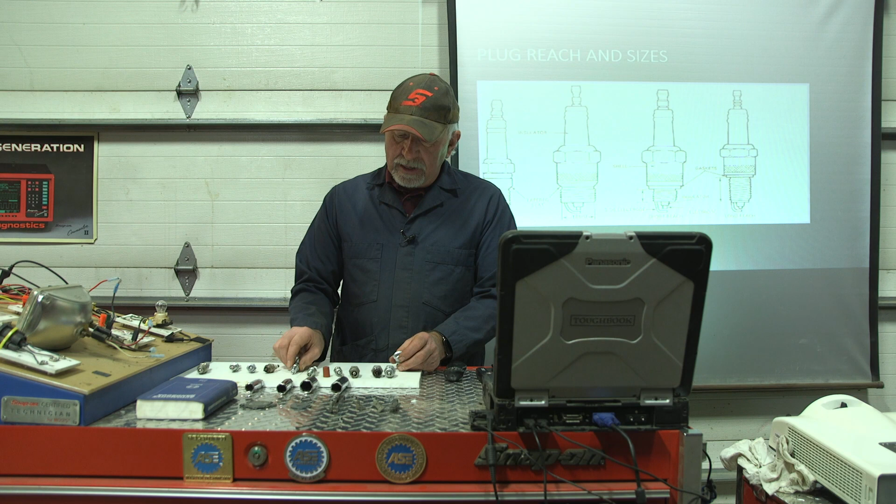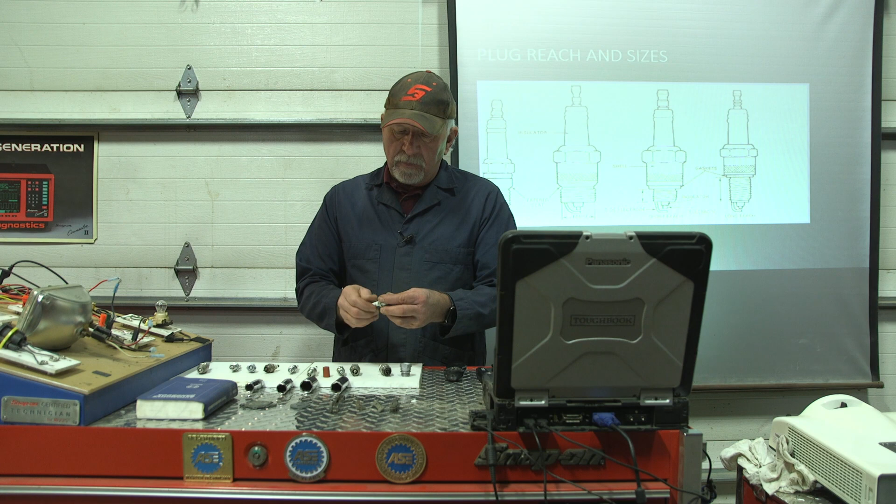That is simply an adapter that goes from 18 millimeter down to 14 millimeter. Where this really works out is it allows me an endless number of different heat ranges that I can install, versus the situation where I'm limited on what I can put in. So here is an example. I just have a 14 millimeter plug, and I can choose literally an infinite number of heat ranges. Try to find the old fashioned 18 millimeters in many different heat ranges, and it's very limited. So if you're doing some modification, everything from tractor pulling to antiques, this is a neat investment. I buy them by the brick from a company over in Michigan, and I have them in literally all my equipment around here, and I put them in a lot of collector pieces. So I wanted to pass that on.

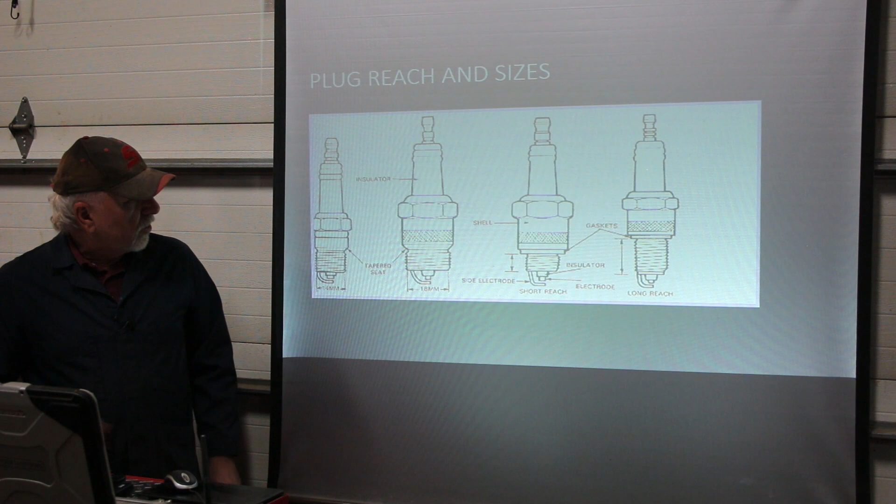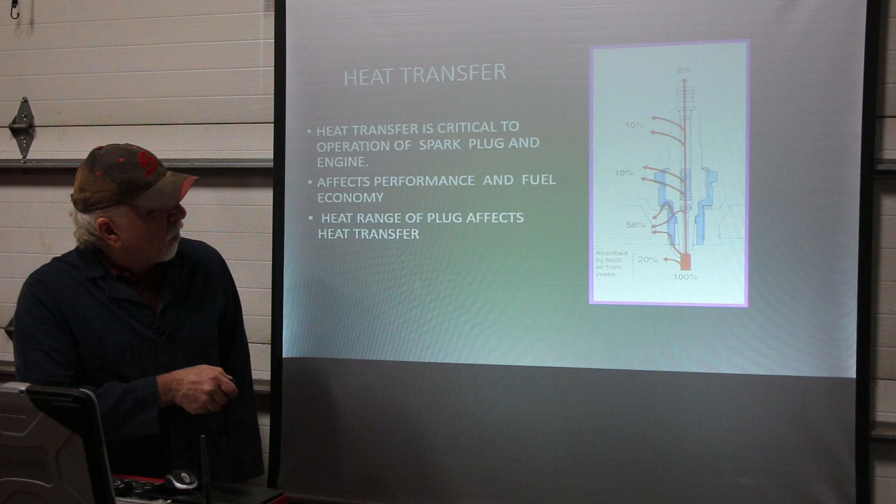Okay, let's get talking about the heat range itself. So within the spark plug, you can see where the depth of the porcelain is, how that's sealed, where this is in, and there's a lot of other configurations we have to consider here. What the performance of the plug itself is. We need to look at how it gets rid of the heat, where it's put in from a performance standpoint, and the heat transfer, how that is going to impact the spark plug.

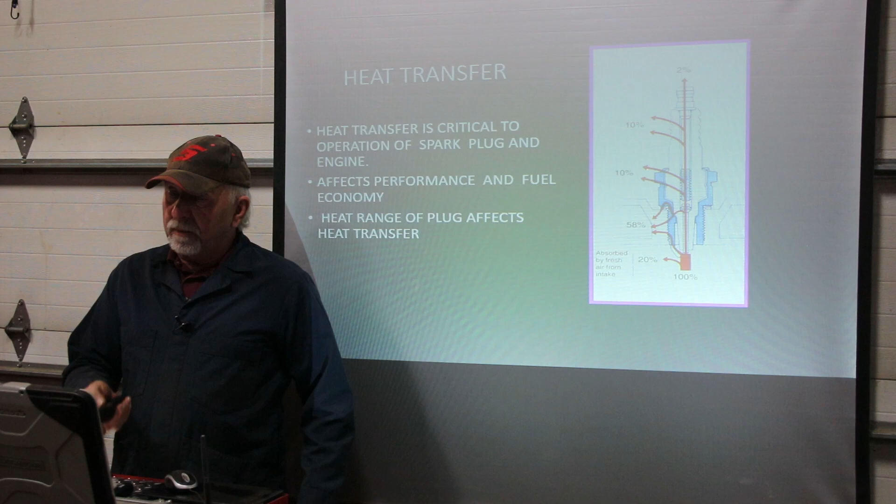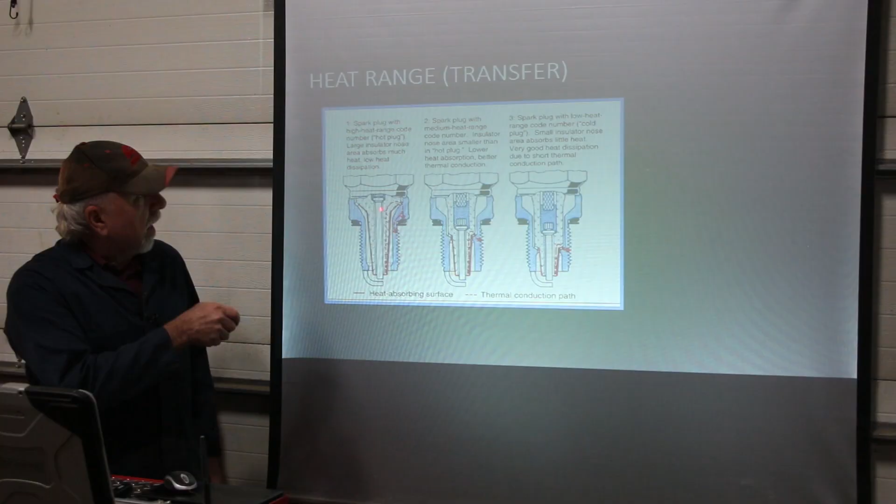Well, you can see here we have the three different versions. We have one that is intended as a high heat range. So the seating of the porcelain goes very deep in. So this is going to get extremely hot, and that's what the goal is. We want it hot. That's going to be a spark plug that works nicely in the high heat range. The next one is going to be our classic medium. And then you're going to have a cold plug.

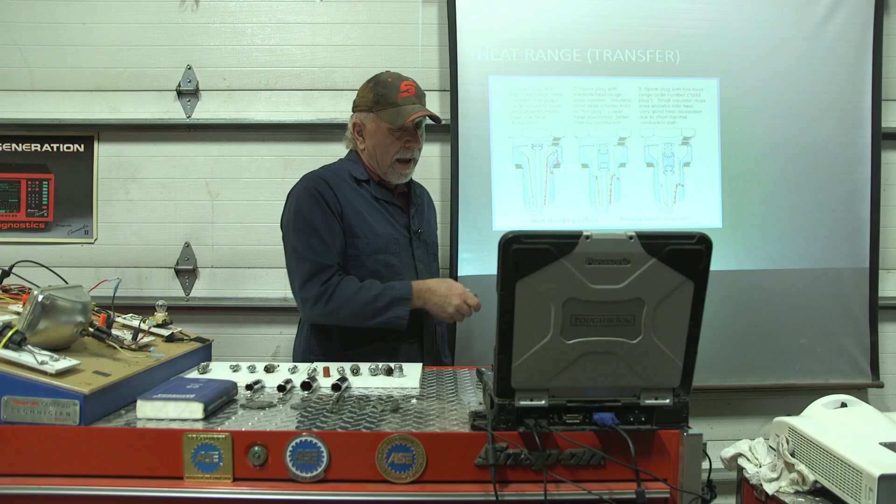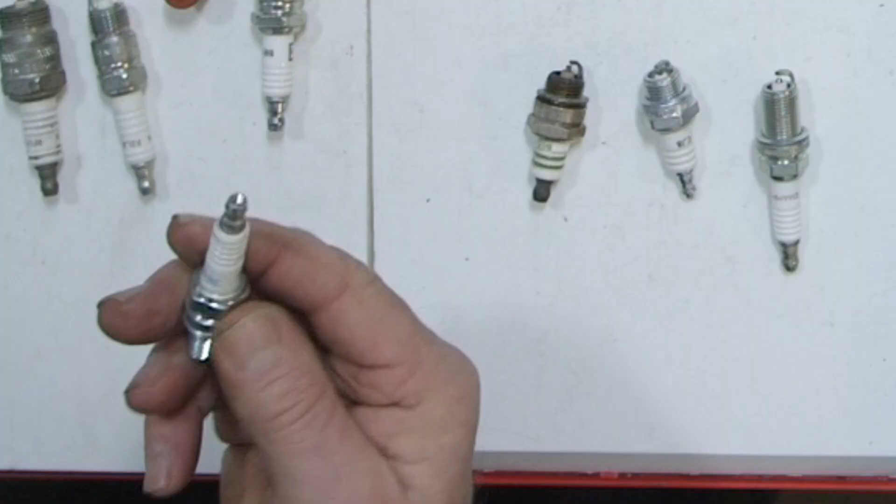And those are the ones that often get you in trouble. Just grabbing one out of your parts cabinet or parts store, saying, hey, I need one that threads in like this. Well, there's more to the spark plug than you're observing from the outside. So that heat range number that you're looking at, that part number, is absolutely critical. So make sure you actually look that over and get the right spark plug.

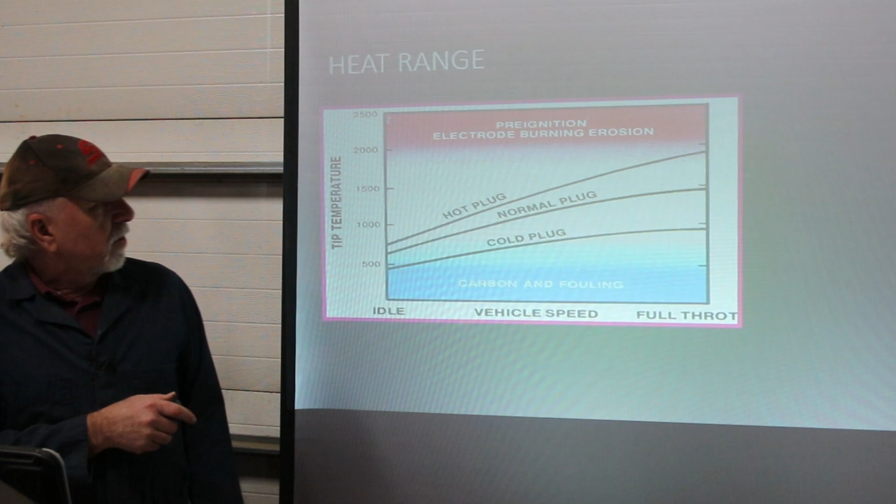Okay, so here's what happens. If we have a hot plug, it's going to be resistant to carbon fouling, but prone to pre-ignition, electrode burning, rapid wear, and can deteriorate the engine, sometimes very rapidly. So the choice is critical.

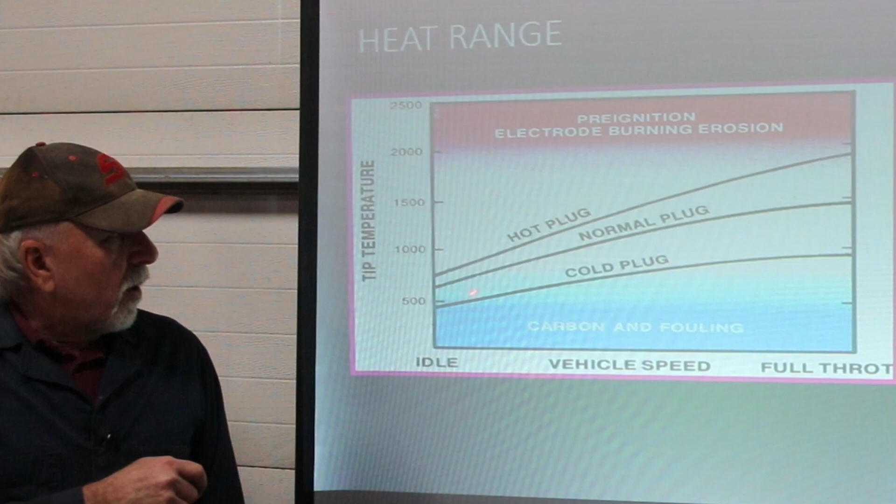Now, on some of the older applications, in all fairness, you will learn if you've done modifications. You put a supercharger, you put a turbo on there, you got nitrous, you change the compression ratio. Now you have to consider what you're going to do with the spark plug heat range. So that is going to be a variable that you'll have to contend with. Now you've become the engineer once you've done that. So having a good understanding of the spark plug heat range is going to be critical.

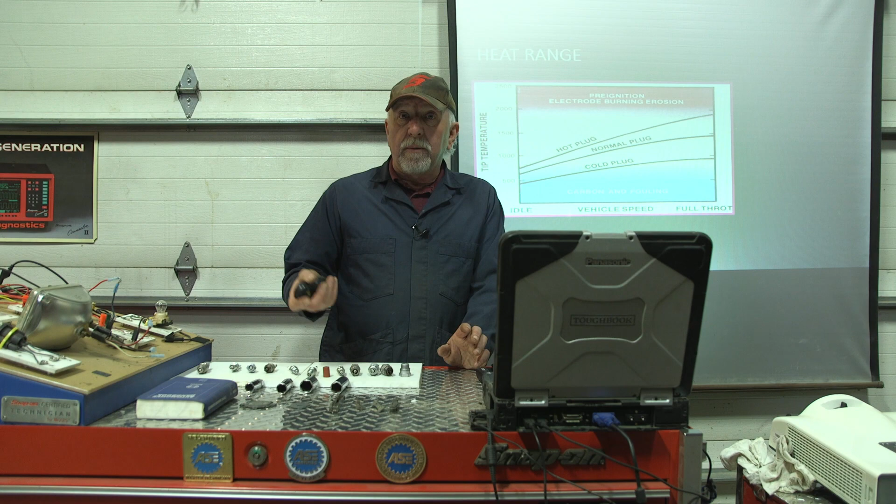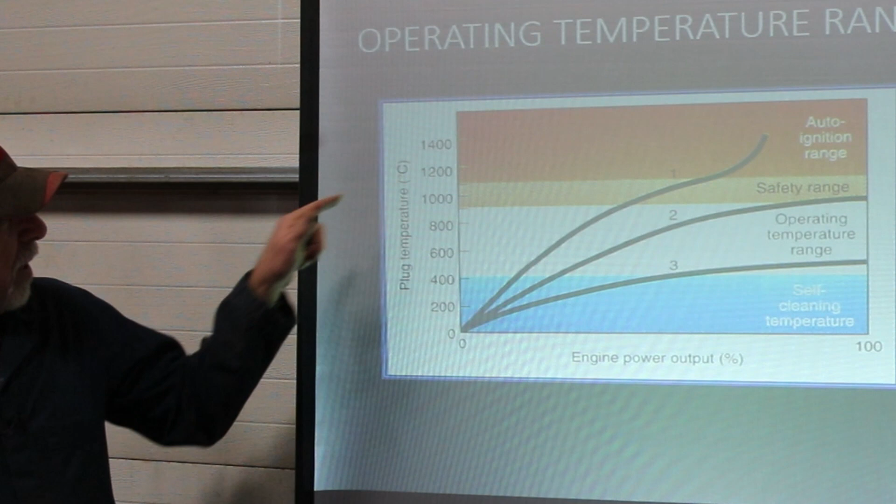So let's talk about this temperature. When we get up here, this is in centigrade. If we get above around 1100 degrees centigrade, we typically now are in auto ignition. Basically think diesel. You got so much heat that that hot spot is simply going to light everything off. And then you got your safe range, where you're getting right up there.

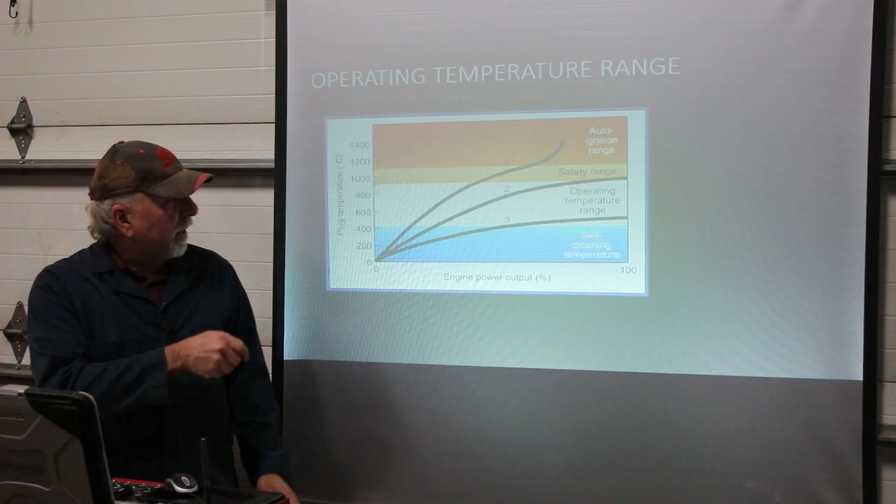The idea behind that is that if you're going to be running a little hotter, you're in extremely cold conditions, or you have a vehicle that is frequently started but never warmed up, you may have to move your heat range of the spark plug up into that point where you can still get the plug clean enough. But if you're going to be using it under very heavy load conditions, you're going to be in that narrow orange band here that could get you in trouble.

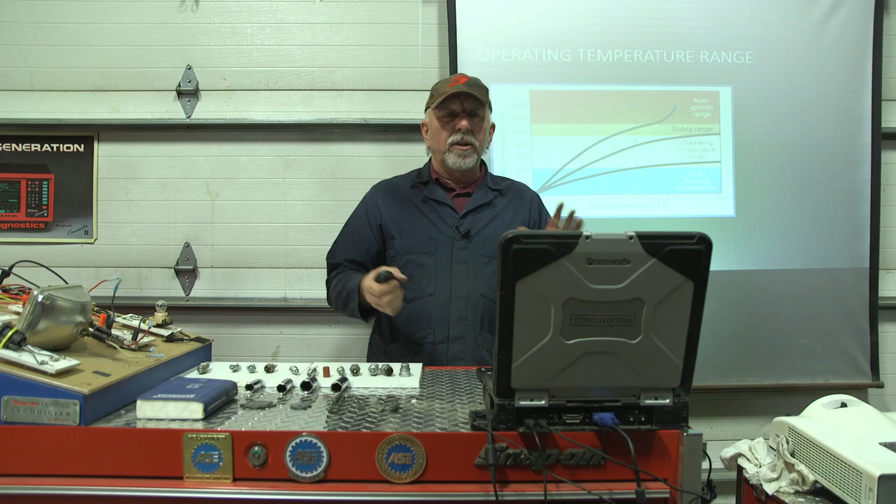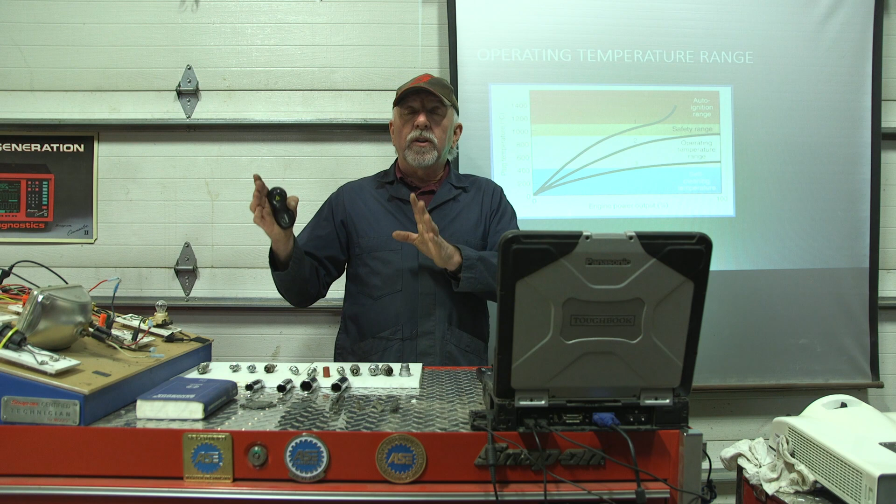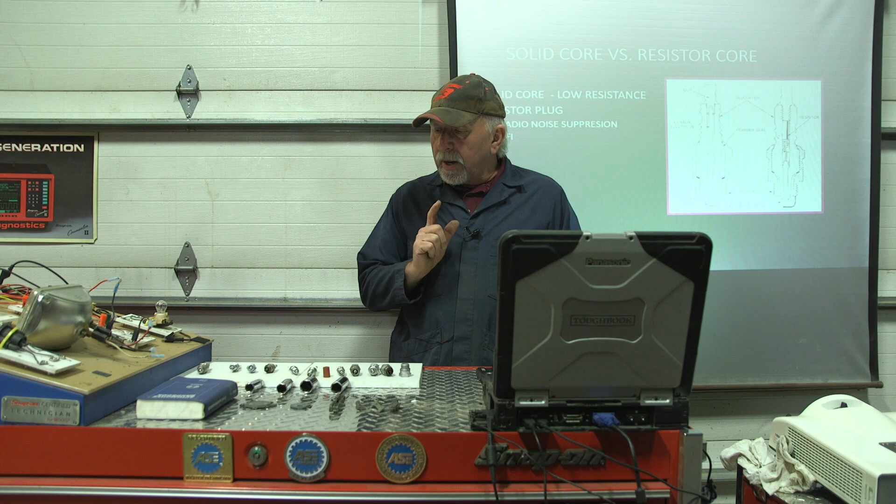Okay, so now we're going to talk about something else that's kind of interesting, and that is if it has a resistor or not. In other words, an R-type or RFI suppression spark plug. What they basically do is, you can see from the picture here, they put a resistor in. And I'll give you a little piece of information that I've learned over the years.

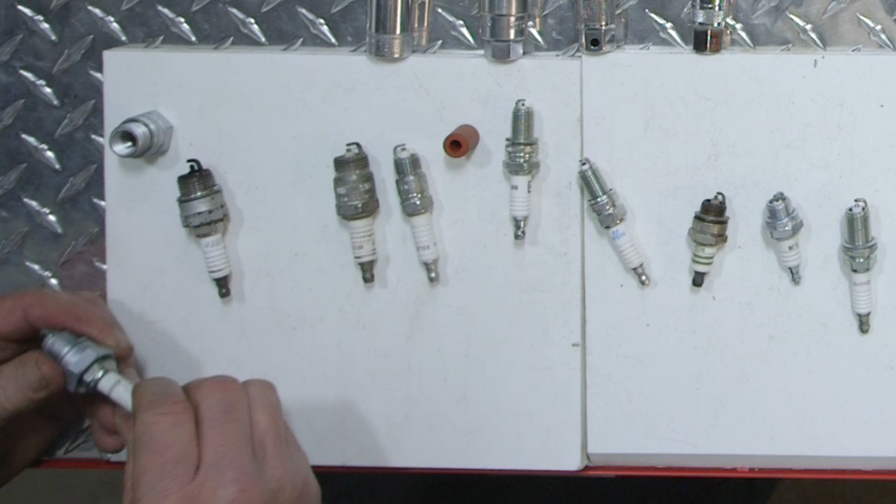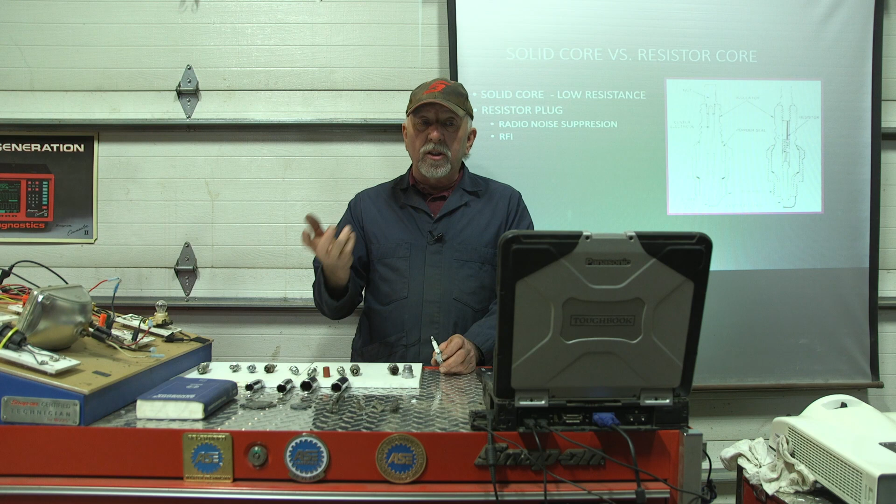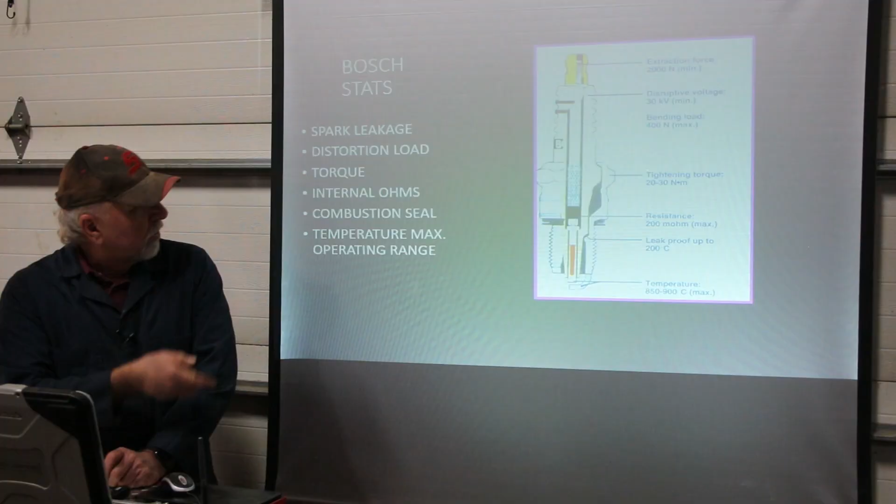So think about a coil buildup. Your coil is going to build up, get to saturation, and ionize across that gap. So in the case of a resistor, you in a sense have two dynamics to get over, let alone the rotor index issue. So you got a whole series of things to jump. When we go into scopes in a later episode here, we'll get into that in great detail. But right now, let's think about it.

The spark plug itself, if it's going to have a suppression resistor in there, that's going to eliminate radio noise and interference with electronics, but is going to have to take a little bit more energy to go through. Our coils are usually 4 to 10x more than we need for the ignition itself. So it isn't that critical, but you take an old magneto. So remember, if you're using this technique with this adapter and putting a modern spark plug in, you may not get the performance you had hoped for if it's involved with a magneto style.

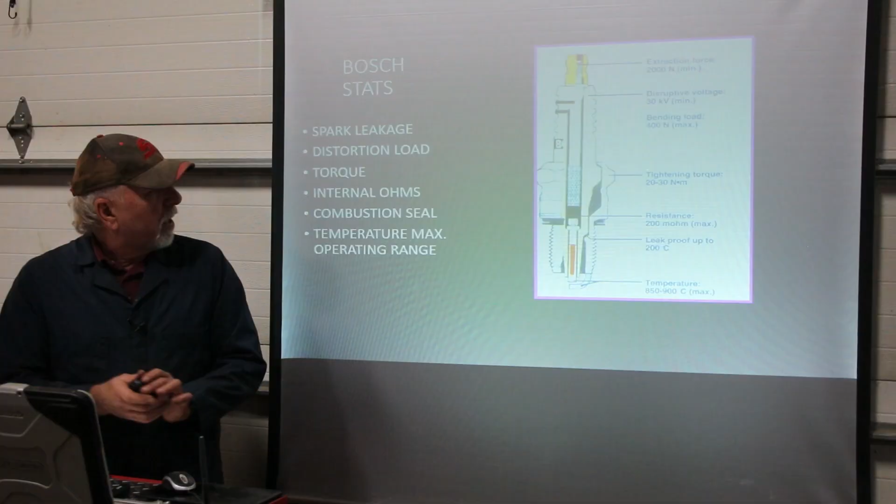A number of things here that we want to talk about with spark plugs are really, really critical. So an example here: spark plug leakage, distortion load, torque, internal resistance, combustion seal, and then the maximum temperature that it can operate within. Some of them are all criteria that are established by the manufacturer.

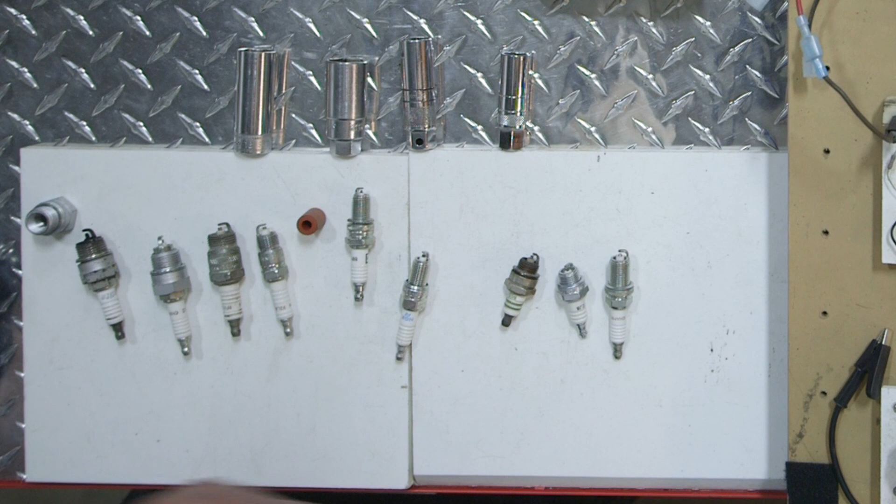And it reminds me of something that I always find kind of interesting: I have a variety of different manufacturers, and it's kind of like cars, motorcycles, snowmobiles, you name it, or sports teams. Everybody's got their favorite, and there's a reason theirs is the best and other ones are the worst. In my experience, I probably have changed out 10,000 spark plugs in my many years, and I cannot tell you that one is that much better than the other.

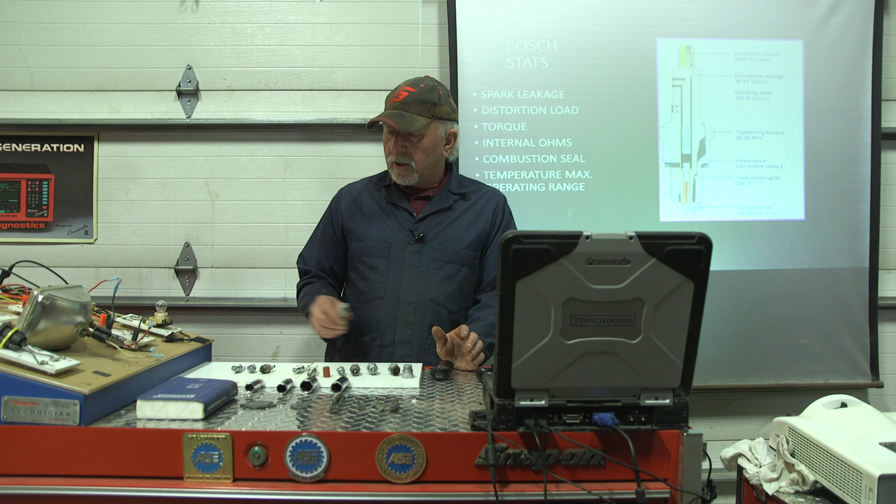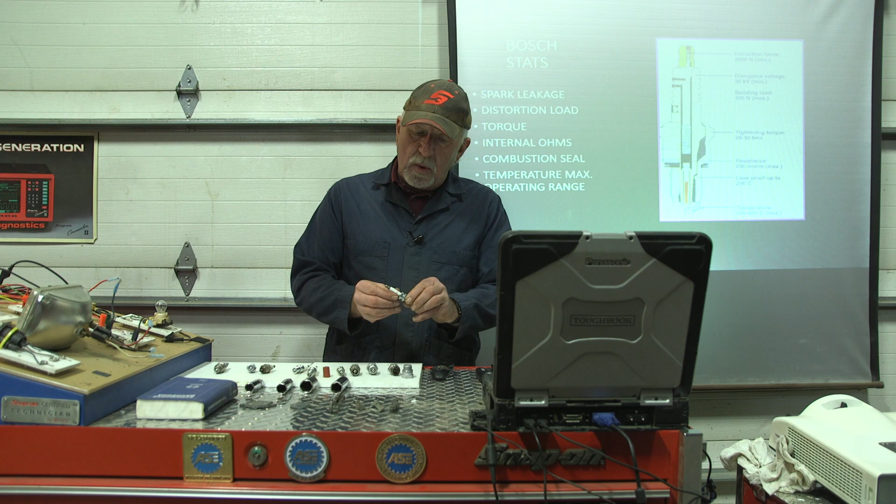You find some quality issues, and I have to look at quality as being one of the biggest factors, is failure of the plug if it gets stressed. That's something I've seen over the years, but usually if it's getting stressed, there's something going on. Improper installation has been one of the more common ones that I've seen. The one that I always kind of disliked, that I knew it was really a quality issue, is when the porcelain would actually push out of the metal formed section of the spark plug itself. I've seen that a number of times, and that is just a poor quality spark plug.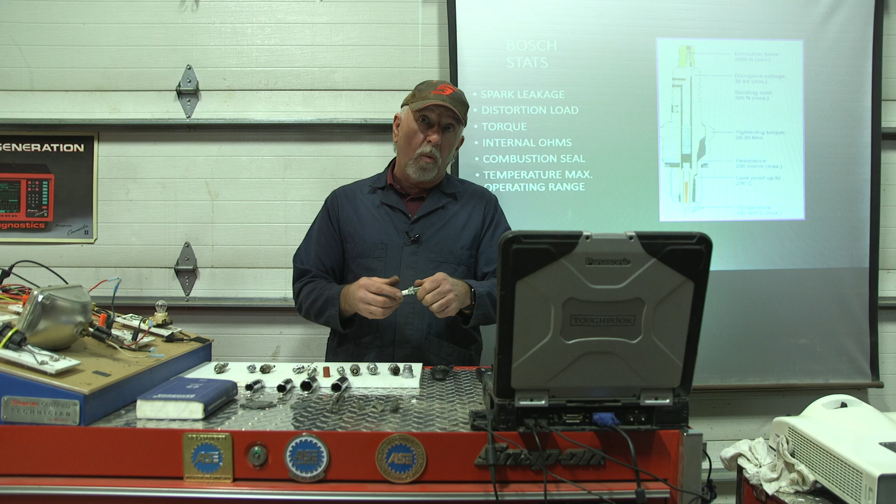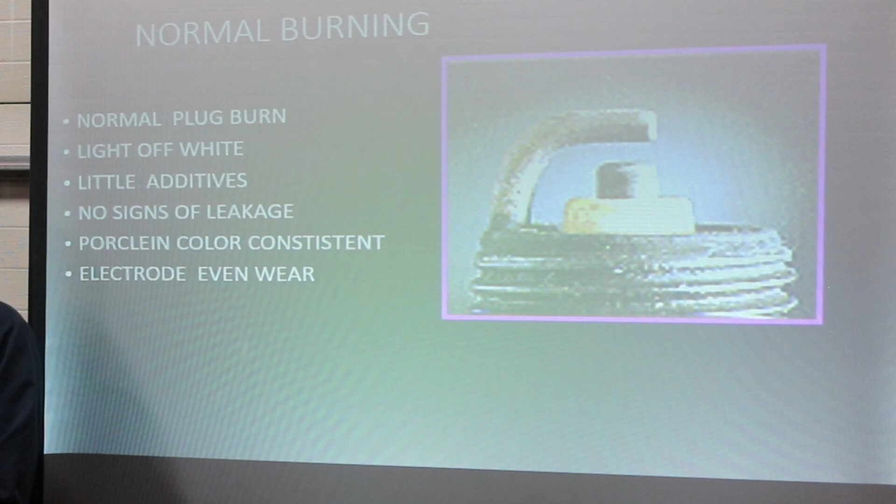Okay, let's talk about combustion itself and how it affects the decision you're making on changing out the spark plug. As you can see, this one is out of a small engine. It looks pretty normal, a little bit on the darker side. It needed changing because we want to start them when they're cold. That's one of the keys: get a new spark plug in there.

Here's one off of an agricultural application where the operator didn't know that the choke needs to be pushed in. I can tell you a little story on that one. It had a very powerful coil. It was able to withstand quite a run, but the reality is when you're literally pouring liquid fuel in there from a choke being left on, eventually it's going to meet its expectation of where it can go. So this was a good example of that.

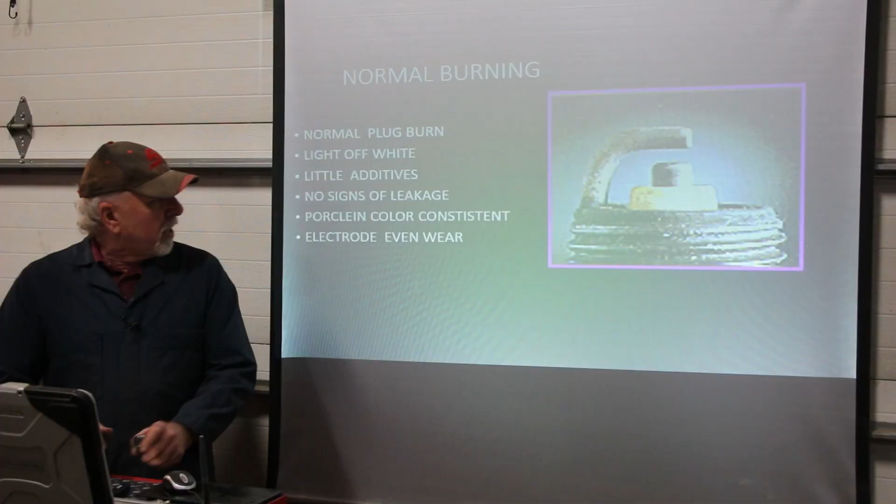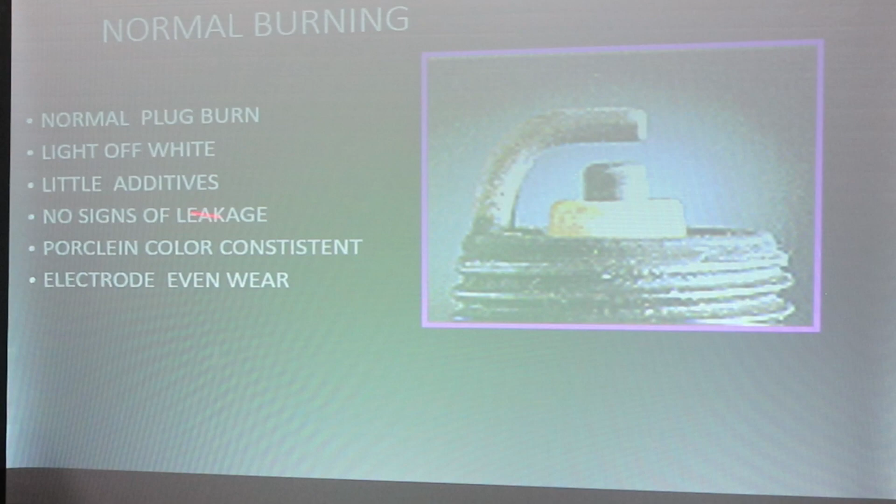So let's talk about here. A normal plug is going to have a small amount of whiteness on there, just a tan color. You might have some additives. Everybody's big on the miracle juice, especially if there's a problem. So they find something at the parts store and put it in there, and a lot of times those additives can build up on the spark plug itself, not necessarily causing any problem, or they may cause a lot of problems. But in this case, we're just talking about light additive buildup.

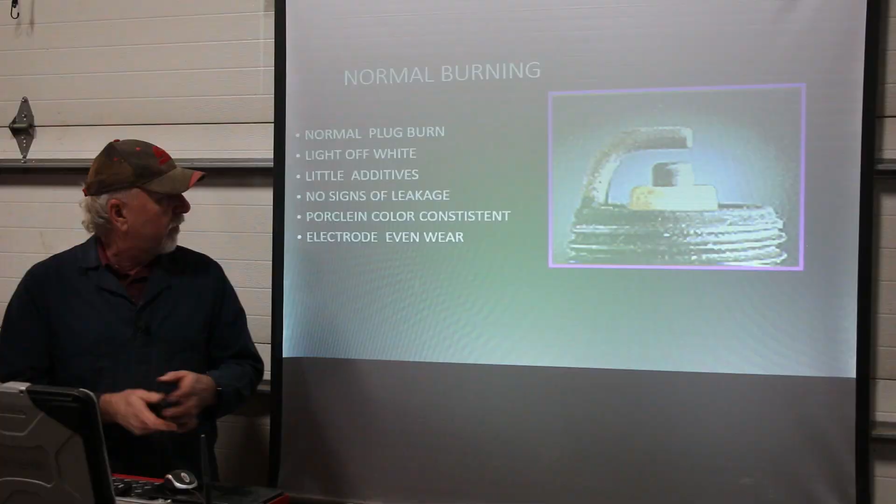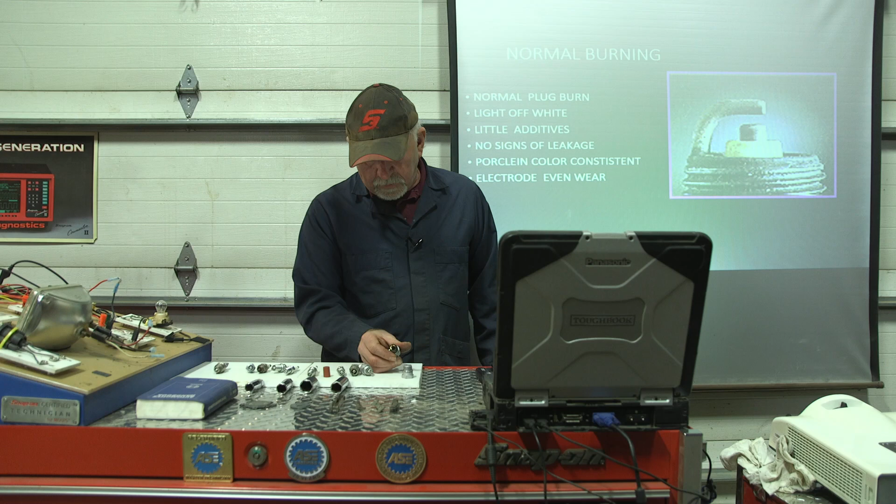No sign of leakage. If you're looking at the spark plug itself, you're not seeing any combustion gases leaking by, either where the crimping goes down here for the porcelain, or if it's not sealed tightly with the gasket or the tapered fit. We're looking for the color of the porcelain, and then even wear on the electrode itself. That is not quite as critical, especially as you get into modern spark plugs with the exotic metals. Here's a Bosch Platinum. You don't see those things worn out. They go 150,000 miles, and it seems like there's virtually no problem with them unless you have some other related issue. Under normal use, it's not a problem that I've seen.

Okay, here's one with a little bit of a reddish color. That is simply unleaded fuel. That's been around for a long time, but the reason I brought up lead or unleaded is we still have aviation fuel, and we have other special lead additives that are out there, so they are still used in many different configurations. Sulfur will give it a yellowish color.

Let's not forget additives within coolant. I don't have it listed here, but if you've got a small head gasket leak or a leak on the intake manifold, that can change the color. I've seen purplish colors, reddish colors, and greenish colors that are typically caused by antifreeze getting in and being burned in the combustion chamber. Usually it's a small amount, but it's enough to change the color from the dye that's put in the antifreeze itself.

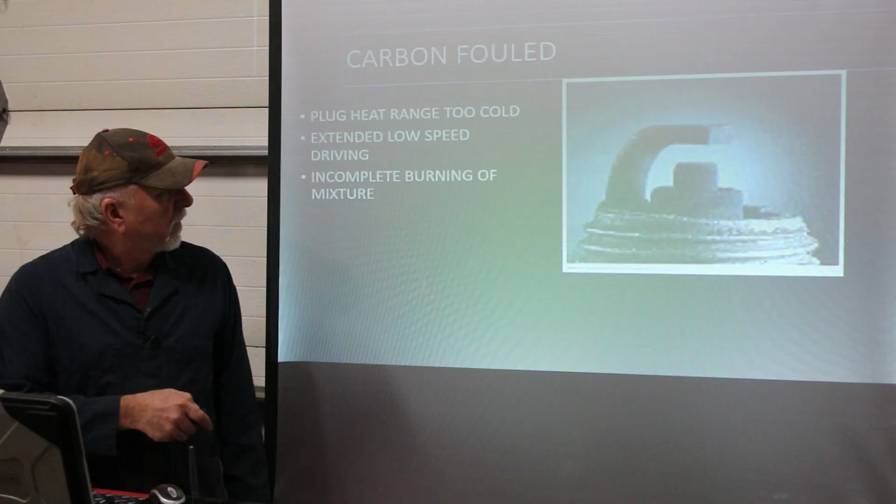Okay, carbon fouling. Here's an example of what we were talking about. Probably one of the more common ones you're going to see is carbon fouling. Something's gone wrong: the ignition system's failed, or the engine's gone into overfueling. This could be everything from a little Briggs & Stratton all the way up to a direct injection gasoline engine. They fail, and when they fail, often it's going to show up on a spark plug.

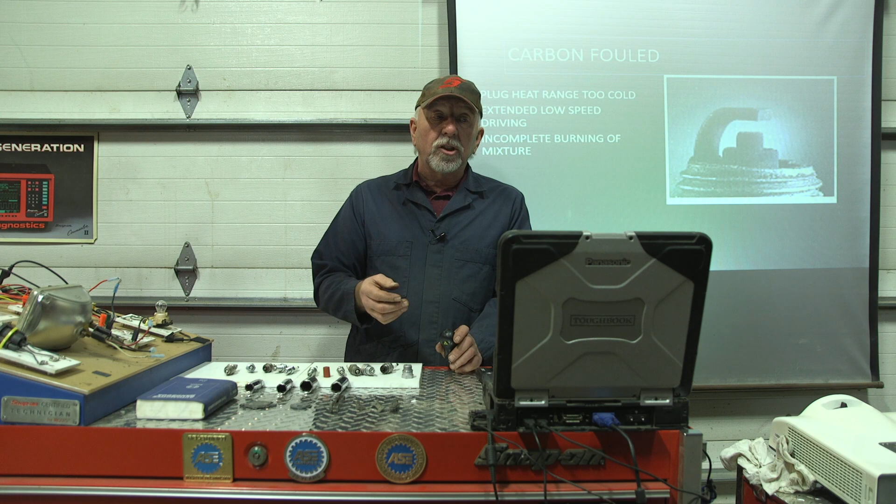You need to be able to read that spark plug. That's part of the troubleshooting and diagnostics that's needed, to make sure that you, as a skilled technician, can read the spark plug and determine, okay, that's carbon fouled because it's wet. It's too cold a spark plug. The engine's run into excessive idling time, things of that nature. That's where you start making that decision.

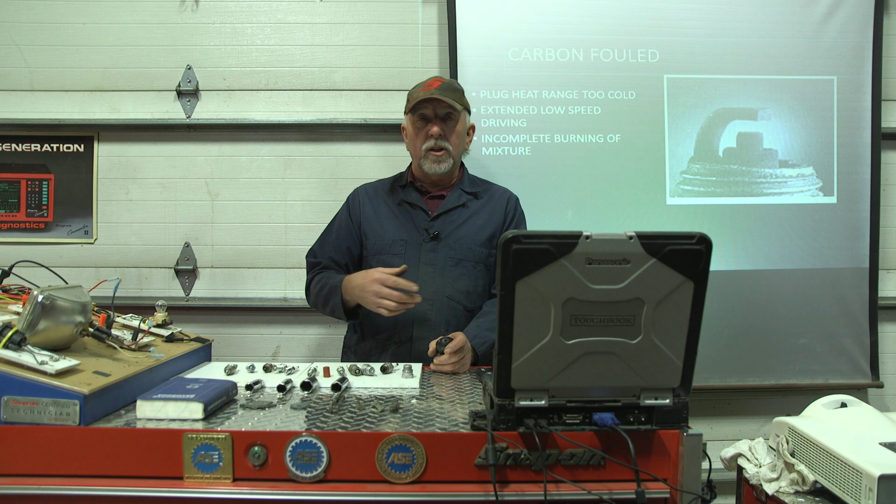Do I fix a problem? Do I change the heat range in there? Is it overfueling? Does it have a bad pressure regulator on it? Is it an older style carbureted vehicle with a choke issue, or is it simply that the ignition system is putting out such a low amount of energy that it's fouling the plug out because it can't generate enough spark, so we have an excessive amount of misfire?

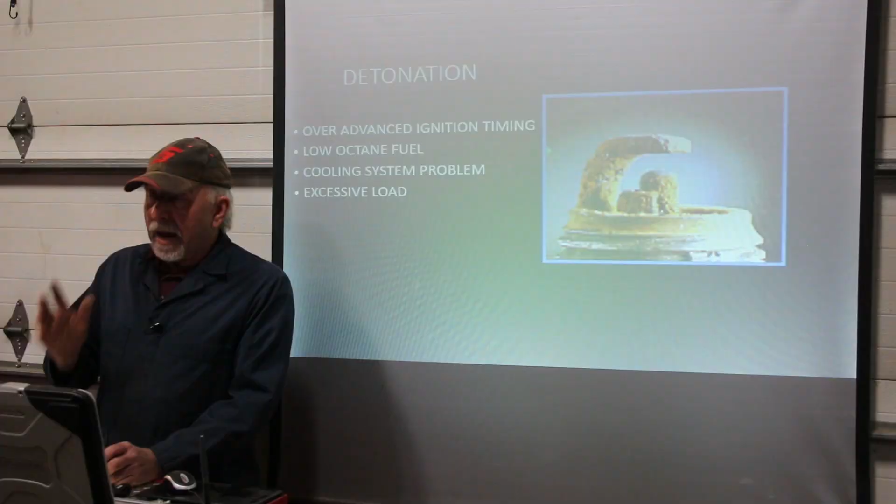Detonation, that is the death of a lot of components. So this detonation is simply low octane. I have a supercharged vehicle, so I'm very aware of octane considerations. Over-advancing on the old mechanical timing, but let's not say it.

I've done a lot. Some of you have had experience with this, where you do programming on a late model one, changing and altering timing and fuel calculations. You can quickly have this. So reading the spark plugs is kind of the ultimate. With knock sensors that are on cars now, really going on 30 plus years, we haven't talked about detonation much because we don't hear it.

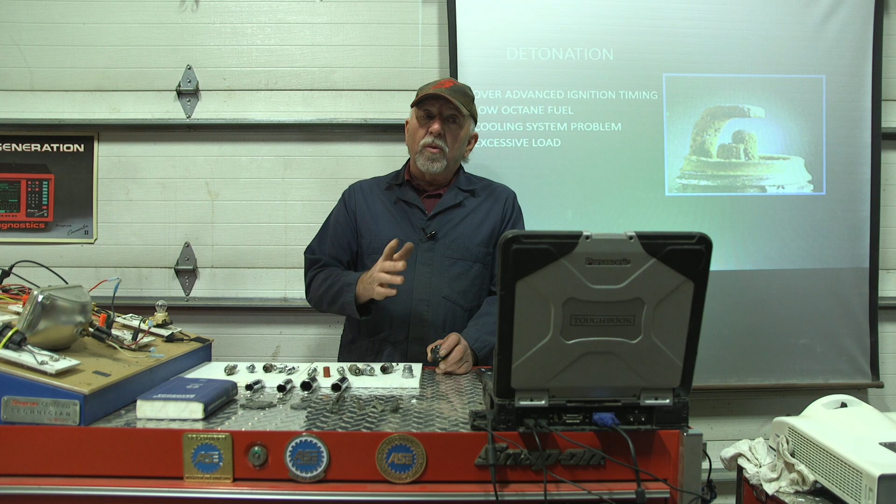Many manufacturers will run the vehicle right at that jagged edge of detonation, but not enough to harm the engine. That's where maximum fuel economy and performance is found. So it's always that finite condition. If you've driven vehicles with manual transmissions, lugging the engine, too high a gear, too heavy a throttle opening at too low a speed can cause this, simply because they can't back the timing off far enough.

Okay, fuel fouling. Now, we kind of talked about that earlier. This is where you actually have so much fuel going in that the spark plug is, think about it, shorted out. It's incapable anymore of actually firing. In that particular case, it's going to be your magic P0300, whatever number, and you might pull a spark plug out and find out, okay, it's overfueled, it's fuel fouled. What would cause it to fuel foul?

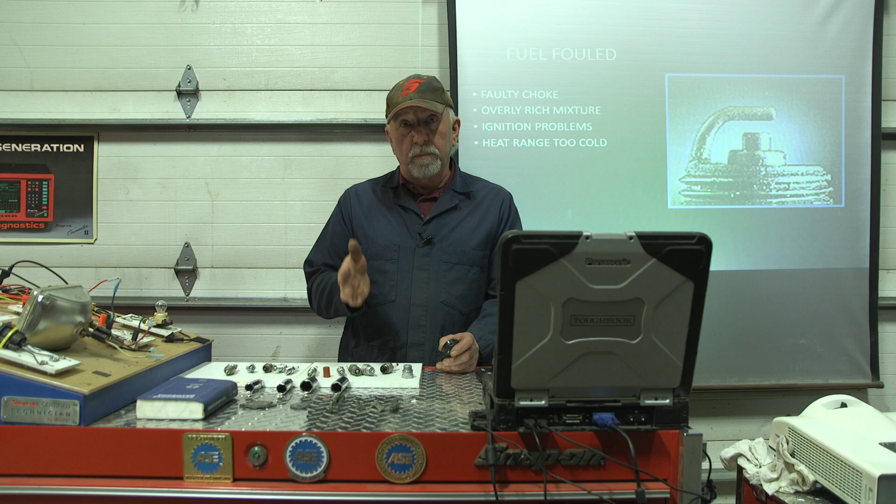Well, in my experience, and I am on some fairly late model vehicles, typically a fuel injector stuck open for whatever reason. I've run into them both mechanically stuck open and electrically stuck open, where the driver was involved and simply shorted it out on the ground side of it. One injector is simply hung open and is overfueling. Two, as I said, conventional, just bad injectors.

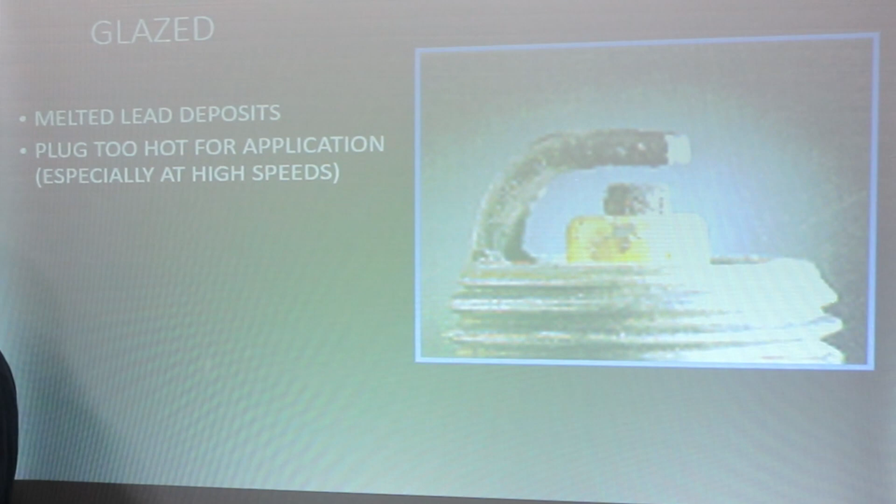Glazing. Now, this is caused typically by too hot of an application, where you're getting right on that jagged edge of overheating. Also, a word to the wise, whenever you change spark plugs, this is an old piece of information from yesteryear, but it's as true today as it was 30, 50 years ago. When you put new spark plugs in, take it for a modest drive, because the little pores in the electrode need to basically get filled up with combustion carbon to seal them off.

If you go out and put new plugs in there and immediately put it to the floor, with very high cylinder load and excessive fuel, in some applications, some situations, you'll actually have a conductive buildup that will happen within the first mile of driving. So remember that when you put plugs in, take it for a mild, easy drive for the first mile or two, and then you can run the life out of it after that. But try to make it that first little bit.

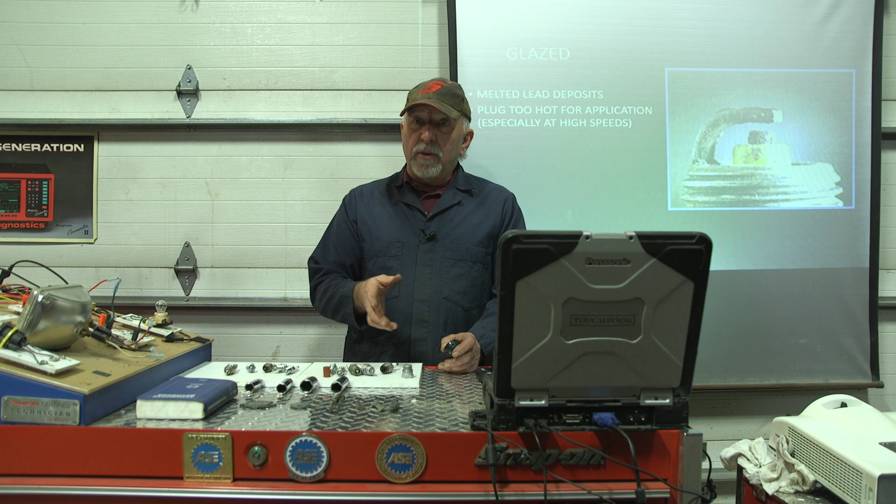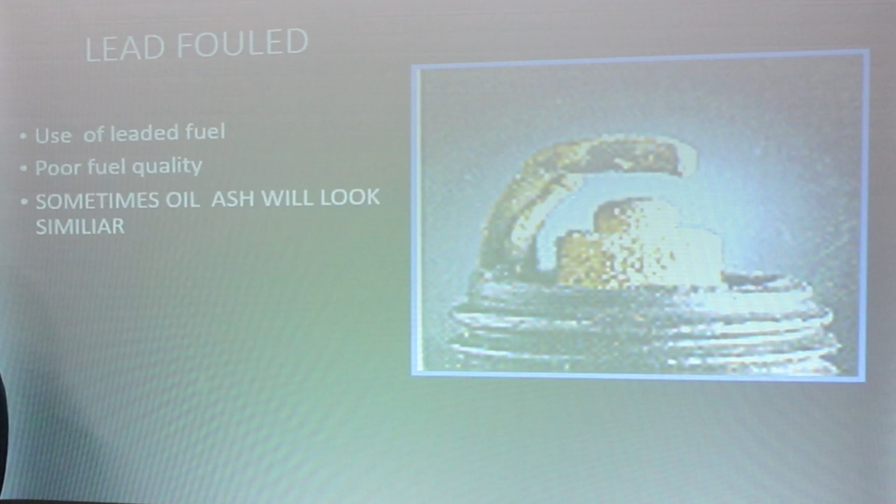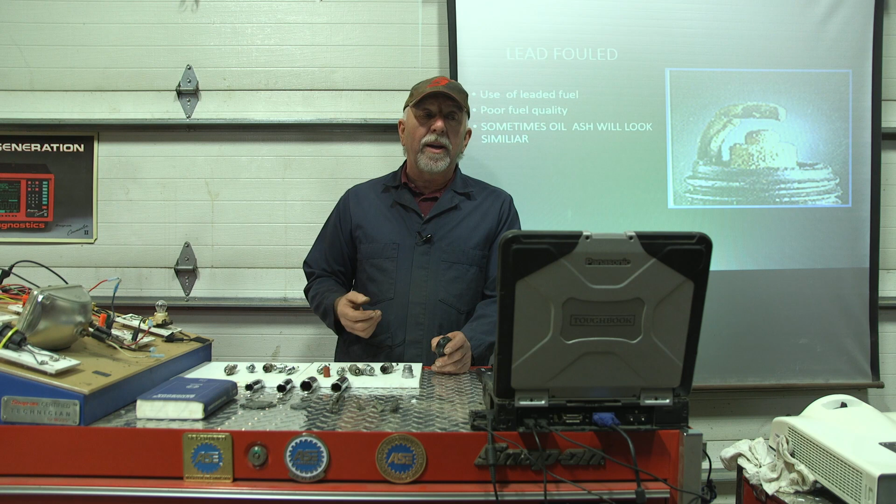Lead fouling. Again, we were talking about lead, which hasn't been around now for basically 50 years. But there are lead additives guys put in, and there's aviation fuel. So there are certain applications where we're going to get involved with lead. Also, remember, you could have PCV related issues where certain types of oil have a high content of ash in them, and that ash can get on there and give you a similar illusion of what you would have with lead fouling.

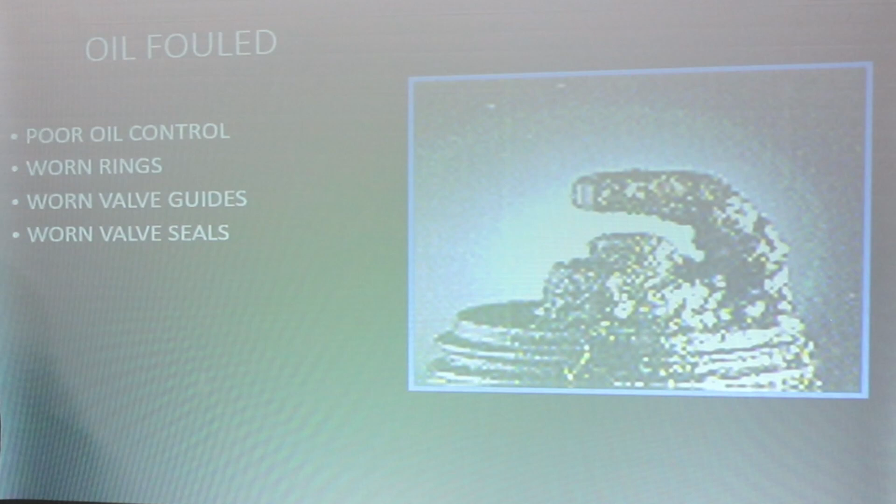Oil fouling. This is where you basically have an engine with poor oil control. Valve guides, you might have an intake manifold, depending on how it's configured, where it's sucking oil from the valley. You could have a PCV related issue. Well, I've seen this on a couple occasions: if 4 quarts are good, 8 quarts are better. Well, I have no idea, but they overfilled it. The crank is literally flopping around in oil, and it simply oil fouls out all the spark plugs.

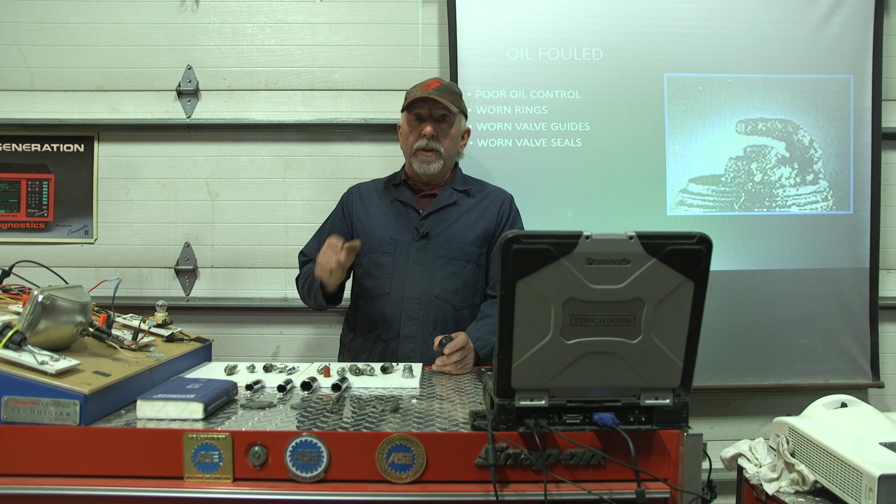I remember some years ago I was teaching a class, and a student had brought a vehicle in that was barely running. They pulled the plugs out, and the fix they thought was going to be putting new plugs in. Well, it needed new plugs, but let's get the other 4 quarts of oil that shouldn't be in there. That was the root cause. This was just the symptom. So, oil fouling. If you do a lot of engine work, you know exactly what I'm talking about here.

Pre-ignition. So that's going to be a situation where the ignition fired too soon. We'd have ignition timing, the programming, or simply physically the distributor in the wrong position. It still happens today, even if you get outside of the programming. Things slip. Guys put engines together wrong. They mismatch parts. These kind of things happen. So you can have an engine, even on a modern digital controlled one, where it's actually got too much advance.

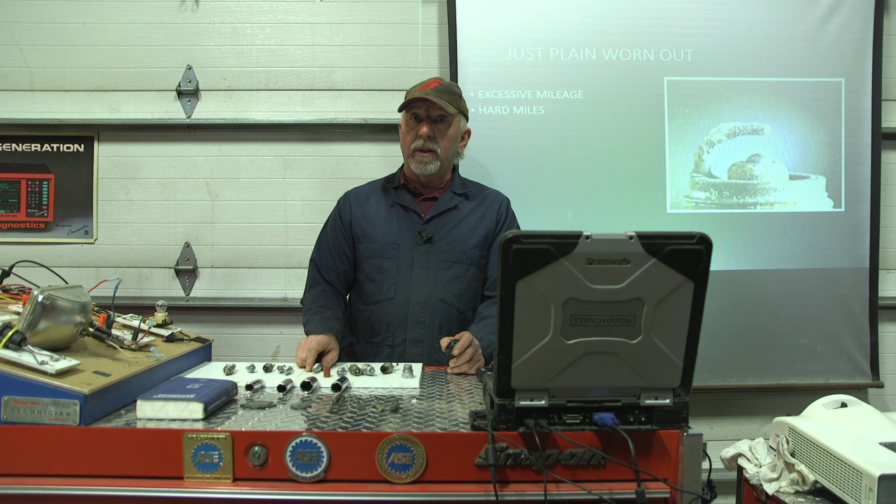Just plain worn out. You don't see that as much. We're talking about plug configurations here. Not quite as much as it once was with plugs just plain old wore out. But plugs still plain old wear out. We used to think in terms of 5,000 to 10,000 miles for spark plug changes. Now we look at 100 to 150,000 miles. And if anybody's been around some of the magic Fords where you can't get the plug out of them, that is something. So one of the reasons we change spark plugs isn't only because the plugs wore out, it's that if you ever want to get it out, you better get it out before the carbon ring builds up too much on the very base of the plug itself, and you break it off in the hole, and there's nothing worse in the world than that happening.

Okay, a couple different spark plug configurations out there. We started talking about that. So you have your conventional plug, and then we talked about the Bosch, and there's iridium, and you just name it. There are so many different configurations. But normally, if it's going to have any kind of hard, precious metal in it, it's not going to have a flat deck on it. Like this, it's going to have a tapered point. So you can read the brochures and figure out exactly what you have. I've seen them, they work. I can't find a reason not to. Typically, it's a dollars and cents situation. But every misfire you prevent, there's two things: one keeps more money in your wallet and it keeps the environment clean. So think about it from that perspective.

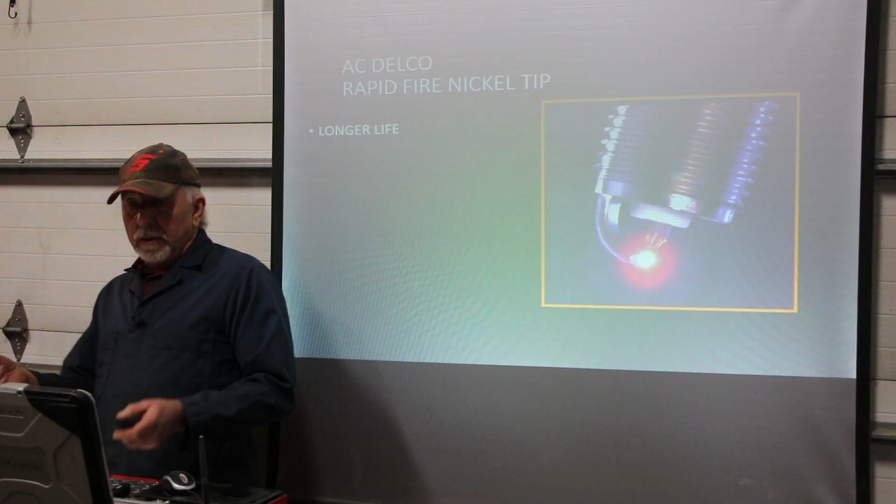Here's a little AC Delco, their design. We have some split fire style. These are typically ones that will work a little better if you're in an environment that has more of a fouling condition or a big variable. Some of these higher end plugs really work excellent in that kind of situation. In this next section, we're going to get into a lot more of the detail of the spark plug and what it lives in. So let's talk about this here.

Things that get to the spark plug. We can have valve guide problems. We talked about cooling system leakage. Things of that nature are going to get at that spark plug. And that's the idea. What you're going to be reading when you look at the plug is what is going on inside a combustion chamber. So having that depth of knowledge is absolutely critical, and even just the logic of getting in and using that as a diagnostic tool. So don't think about spark plugs just simply as something you're going to change. Think about them as part of the diagnostic strategy.

If you've ever been involved with motorsport racing, from drag racing to super bikes, the snowmobiles, you name it, reading spark plugs is what the pros do. And there's folks out there that are 100 times better than me when it comes to reading spark plugs in their particular application. I'm looking at it from more of a holistic overall perspective, but when you get into a specific industry, you're going to find that depth of knowledge is absolutely critical. If you are in a specialized industry, make sure you go out and find that expert. If it's on YouTube or at the racetrack, whatever it is, learn that. You can learn so much in that regard. So that's something to study, but that's where we're getting into the real specialized application.

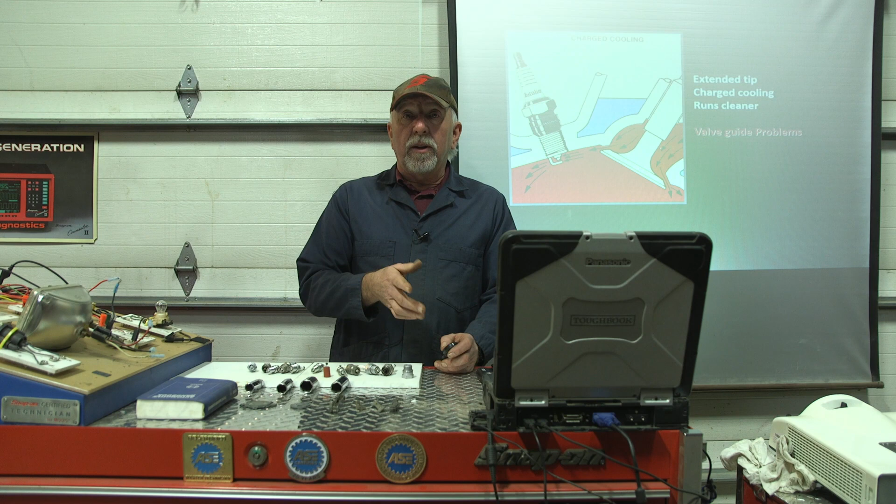Valve guide problems. It's still a thing today. The engines last a long time, but valve seals go out, guides wear out, and oil gets in there. So it doesn't have to be an old antique. We still have a problem today as much as we had yesteryear. The problems just seem to come on at much higher mileage. We used to have problems at 50,000, now we have them at 200,000. But it's still the same problem.

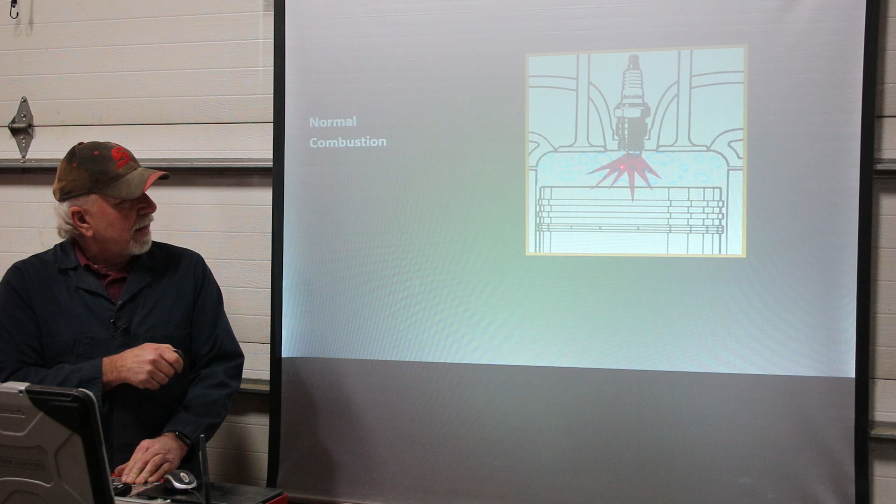Okay, let's get talking about normal combustion. In a normal combustion environment, we're going to have the spark plug ignite, and then we're going to have a flame front propagated. In other words, that pressure, this is happening within just milliseconds.

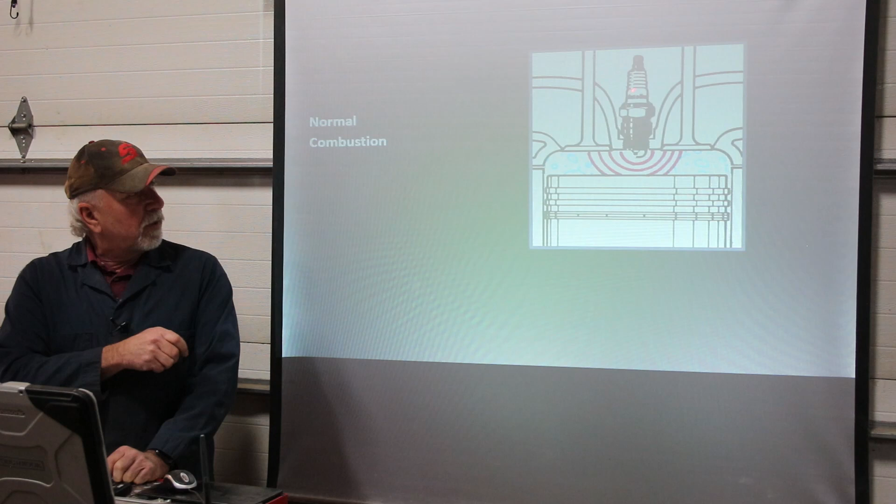So we have the spark plug ignites, the pressure wave goes out. That's the forest fire thing, grass fire, the best way to think of it. A grass fire is rapidly burning across all the fuel molecules, and then we get all the way out and it's pushing that piston down. So the timing of that piston, when the ignition fires, the fuel type, temperature, all that, is to get the maximum cylinder pressure based on the throw of the crank.

Usually the old number I've always worked with is 18 to 23 degrees after top dead center, just like pushing out on a bicycle pedal, is the maximum leverage. The stroke of the engine is going to be the biggest factor on that. The bore is going to be one, and the fuel type. Those are all the variables. But that's a discussion for another class.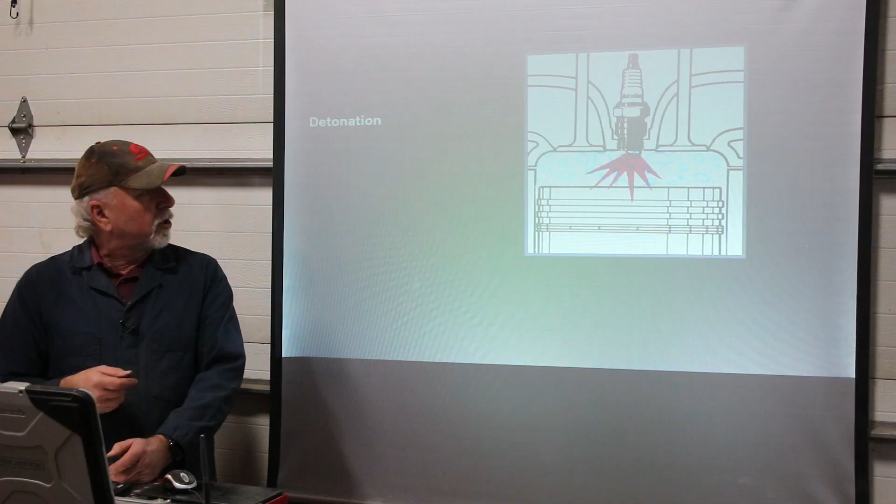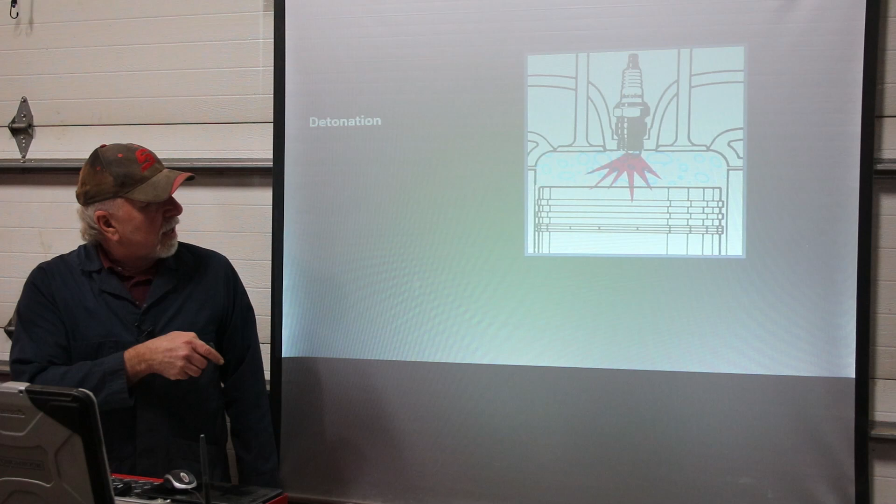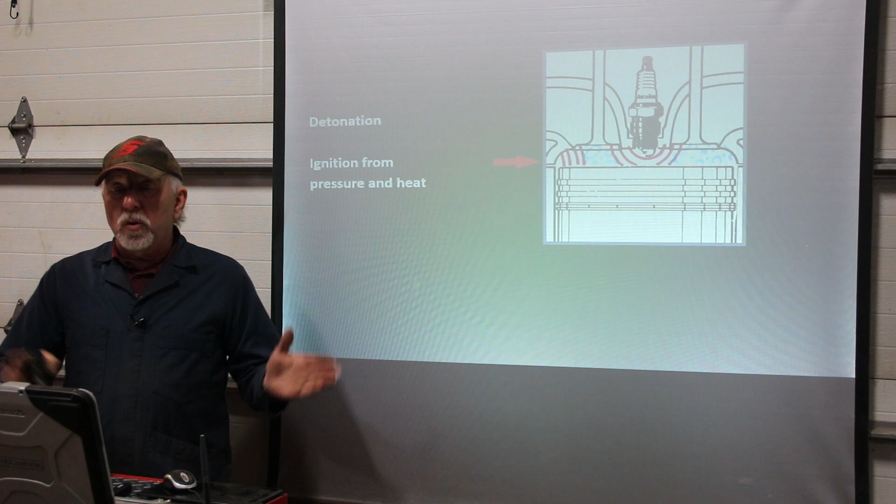Okay, now let's get into detonation. So we're going to have a situation here where spark takes place, so it looks like normal combustion. But now what happens is we have another propagation point. Let's go back to this here. So in a normal event, the cylinder pressure starts to build up. A secondary combustion occurs because there's some carbon in there. We have extremely poor quality fuel, and we have two flame fronts that are coming at each other at sonic

speed. And what they're doing is, when they hit, that vibration, so first off, they burn too quick, so you're getting full pressure before that piston is capable of getting into the right angle for the stroke of the crank. And that cylinder pressure is really, really hard on the top of the piston, and all the parts, connecting rod, bearings. I've seen bearings that have been deformed from this. So that is something we all need to be very aware of.

We don't hear it like we once did, because if we have this occurring, if it is an engine designed with a knock sensor, that knock sensor is going to retard the timing. So that's strictly a fuel economy issue. I've seen situations where somebody put the wrong cylinder head on, a junkyard head on the engine, and it had too much compression, and that engine just got terrible fuel economy because it was always in the retarded ignition condition, but it never set a code. That was a little bit of a brain twister, but that was some years ago.

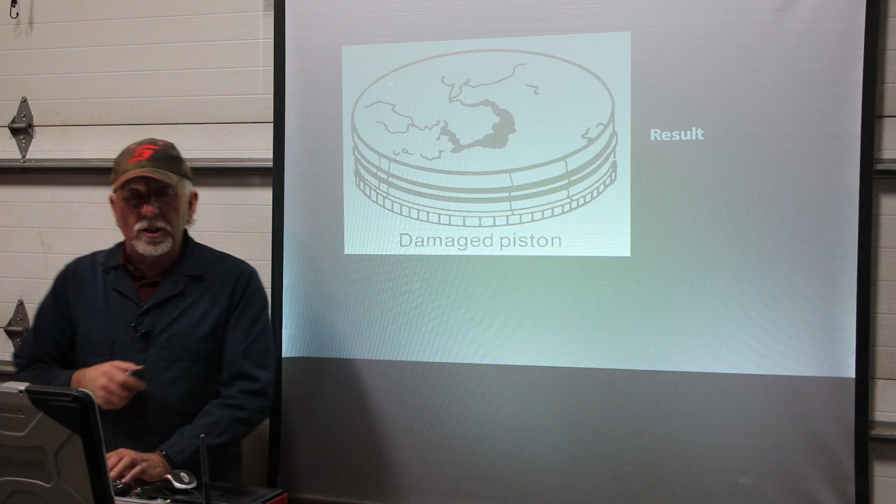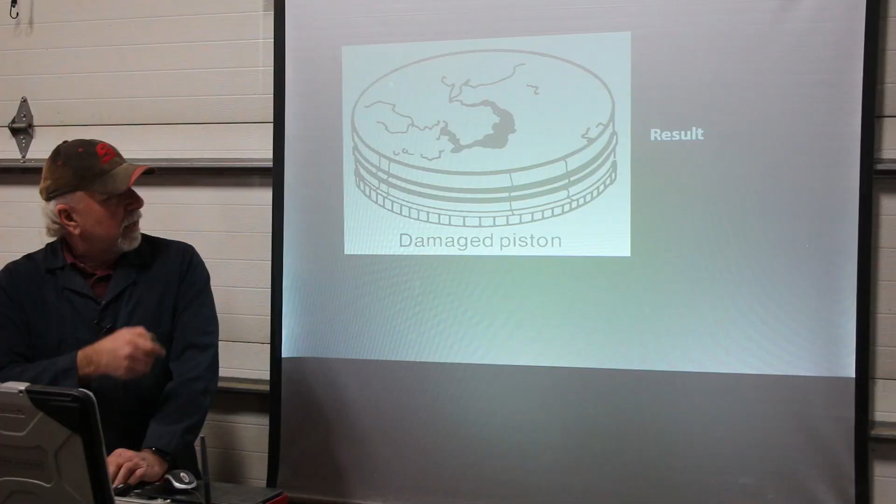So here's what actually happens. When you have excessive pressure, you'll see it deformed or damaged. Often a big chunk of a piston will be down in the oil pan. So keep this in mind. Now we're back to this being kind of the root: the spark plug heat range, the engine loaded, all of that. If we have detonation caused by excessive carbon, too hot a spark plug, timing on, well, that would be pre-ignition, but any of these, this is ultimately one of the bigger factors. It will crack the piston, it will damage the ringland area, so you'll damage the engine. So even an innocent mistake like putting in the wrong heat range spark plugs can have this kind of catastrophic long range effect.

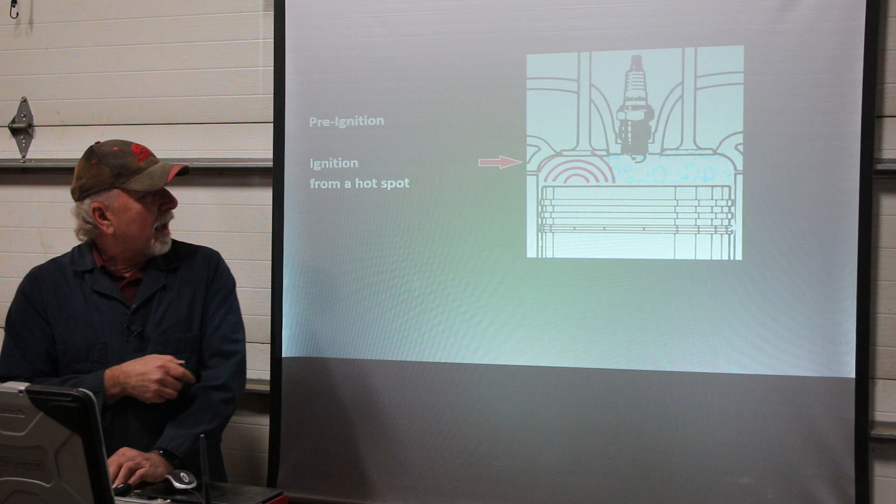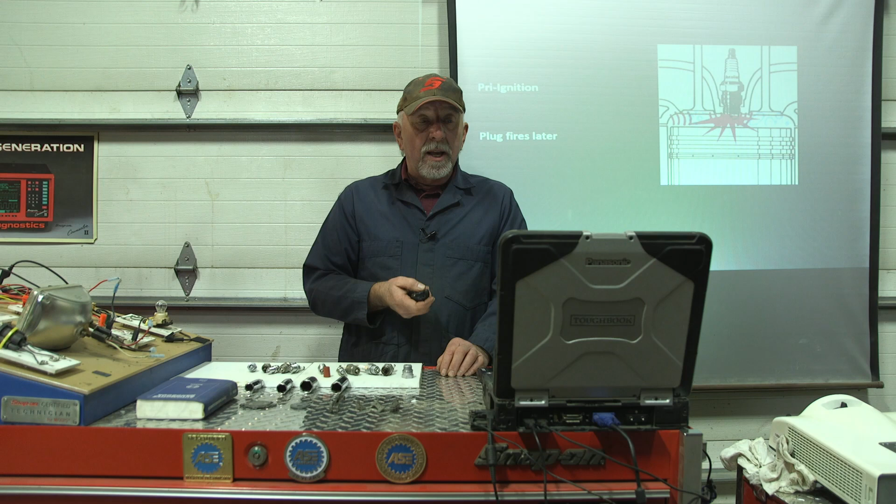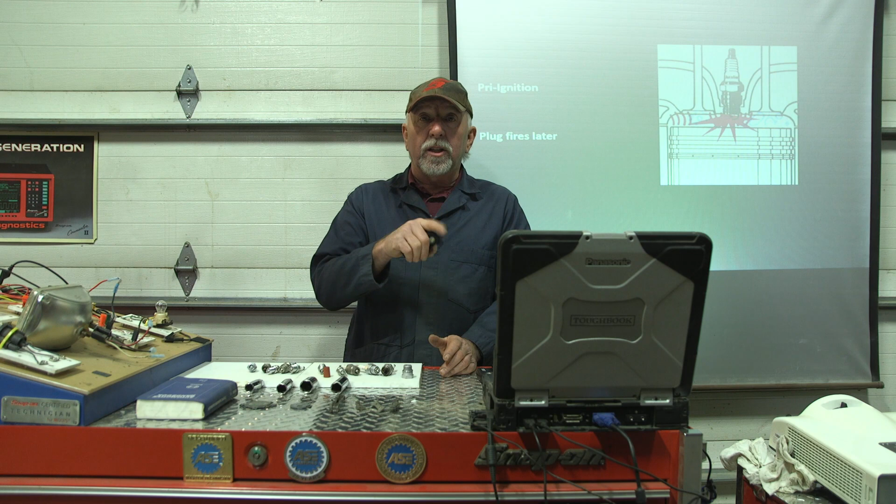So now let's talk about pre-ignition. What's going to happen here with pre-ignition is simply a piece of carbon, and it works just like a diesel. What's happening is that fuel is being ignited long before the spark plug goes off. So now we've got two opposing flame fronts hitting. In this case, it started before the ignition, so that was pre-ignition, the term pre-ignition. And the other one was detonation. That's because we had ignition, and then the cylinder pressure built up, and it caused a secondary front.

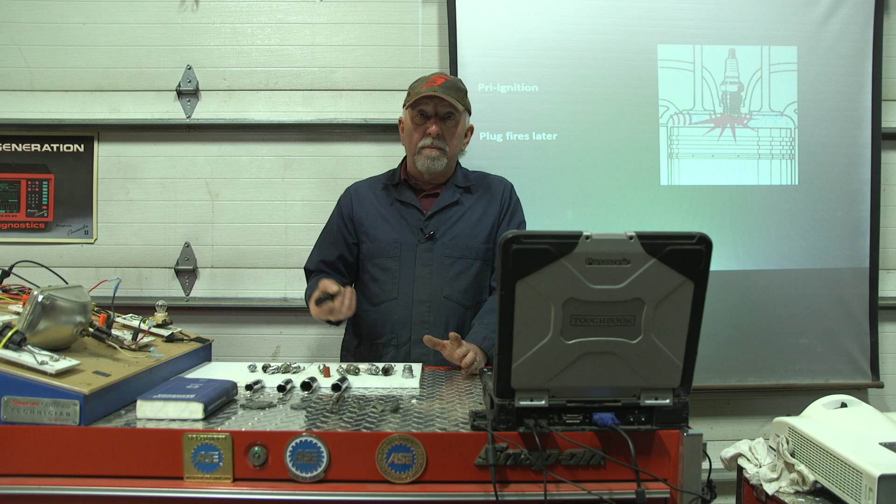What you'll see is still the same damaged piston, the same rattling noise, but these are two distinct reasons. This is the old classic of decarboning the engine. That's 9 out of 10 times. But I've run into little screws and stuff that get into the engine, get on top of the piston, and will cause a situation where you have a hot spot generated by a foreign object embedded in the top of the piston. Again, same crash and the same effects on the piston itself.

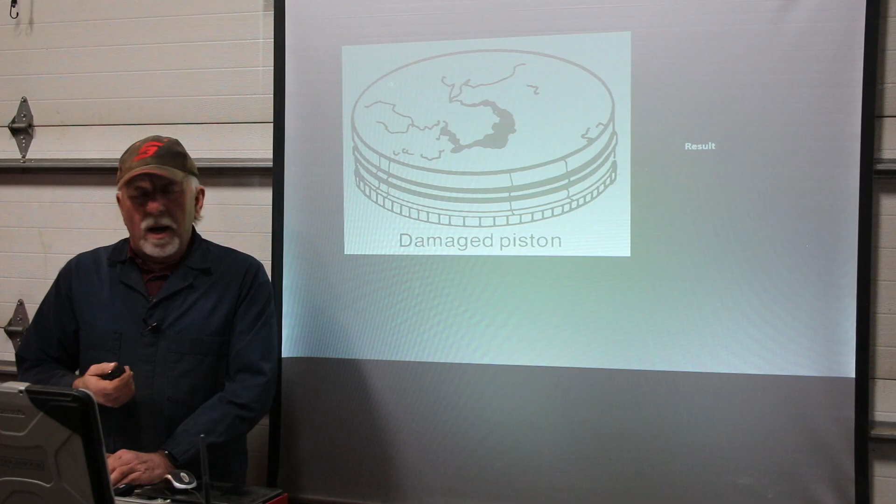Okay, let's move on to the next thing. Let's think about installing. A torque wrench is critical. If you're not installing with a torque wrench, you are playing with fire. You can get by with the old-fashioned cast iron heads. Yeah, I guess we could all say you can get by with it. But the reality is, try to use a torque wrench whenever possible, because professionals use torque wrenches, amateurs don't. We'll leave it at that.

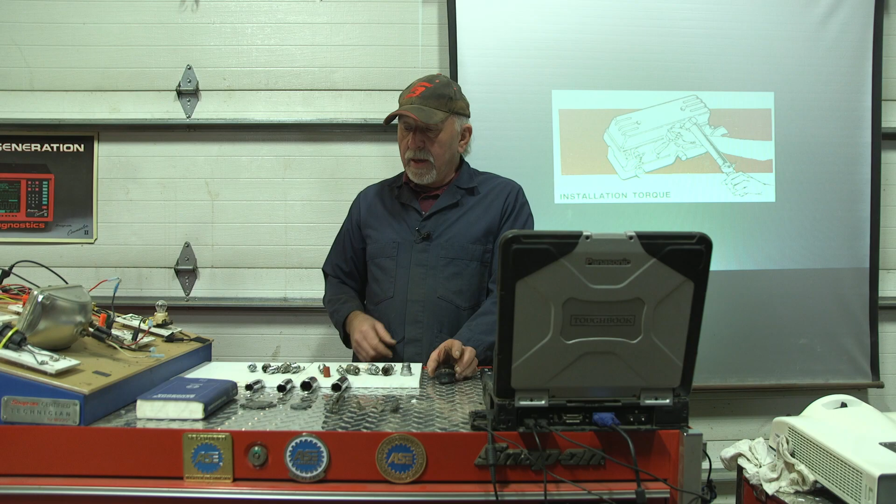Let's talk about spark plug sockets themselves.

So I just grabbed a variety of different ones here. Here's an unusual one. You see it once in a while in applications, i.e. Ford and a few motorsports applications. And that's our 9/16 spark plug socket. And the most common of all is going to be the 5/8 spark plug socket. And then a little less common, but has been around for a little longer than forever, is going to be

the 13/16 socket. There are some other odd ones out there that I did not include because they're getting into some of the antique. And then some of this odd size, and that isn't antique but fairly new. And this would be, for example, an 18 millimeter. And as you can observe, this is not a spark plug socket. So I have the 3 sizes, but I don't have the 4. So when I'm getting involved with that condition here, where I'm going to use this 18 millimeter, I can't put it in like that, heaven forbid.

So let's look at this here. Let's grab one of these. I put it in. The plug is nice and solid in there. That's because there is a boot. This is the difference with a spark plug socket. Okay, the difference between a spark plug socket and a conventional socket, one primary thing is it's got a protector that's going to grab the porcelain. It's going to be in here, and then you're not going to be able to twist the spark plug and let it get locked up against the inside of the socket.

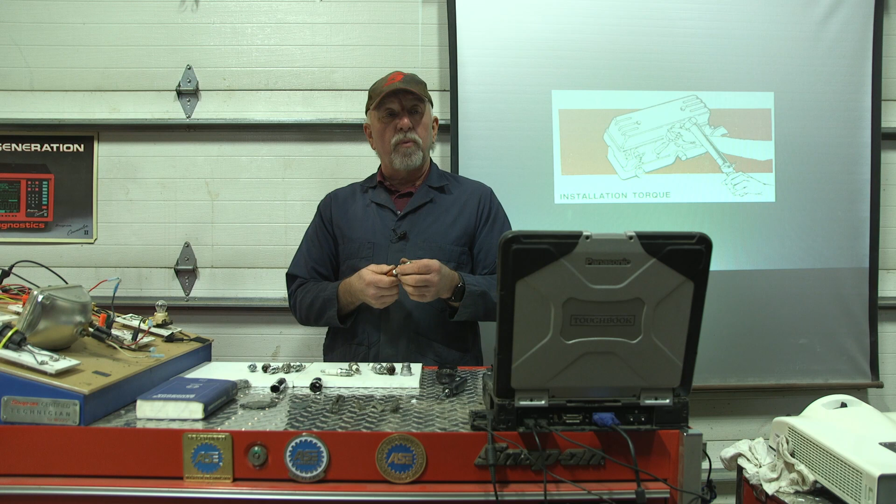Take it off. Remember to pull that out. Sometimes these aren't going to be the easiest spot to get to, but it's critical so you don't break the spark plug itself. And this is typically what happens: you have a break in the porcelain. It causes a misfire. And look at this, I did the work myself. We've all seen this from lay people that do some of their own tune-up work, and probably should have left it alone because it worked a lot better than after they fixed it. And that's the amateur kind of thing that happens. So be a pro and make sure that you have the right tools so we don't have that kind of

condition. And last but not least, let's talk about spark plug gapping tools. I've got a whole variety of them. But the key to this is making sure you gap it correctly. This is an old school one, been around for a little longer than forever in my world. So I'm going to set that one at 35 thousandths of an inch. I can take this and expand it out. I know a lot of people have different opinions on tapping it back or using a tool. But even though you got all these spark plugs from the parts store, make sure you verify the gap on them. There's this style here because some fool at the parts store may have dropped it right on the ground. So you can see here we're right at the 35 thousandths.

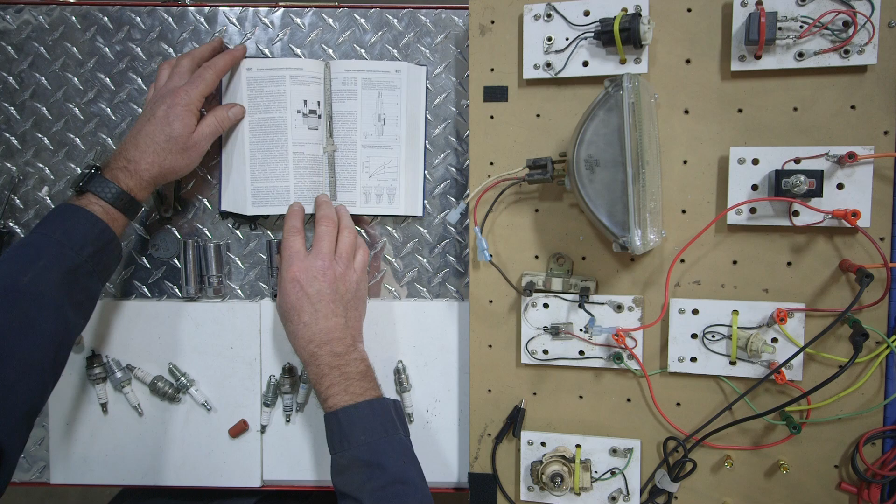And before we end this, let's talk about one thing here. Science. Spark plugs are well defined here. This is a Bosch manual. So if you want to learn detailed information about how this stuff works, this would be a good example of a Bosch handbook to go through and get a more in-depth understanding. If you're making hard decisions in a race application, this would be one of the ones I've learned the most from, being around a variety of different race applications and industrial applications. Then you can learn, and you're experimenting, but utilizing the right tools out there to get that information.